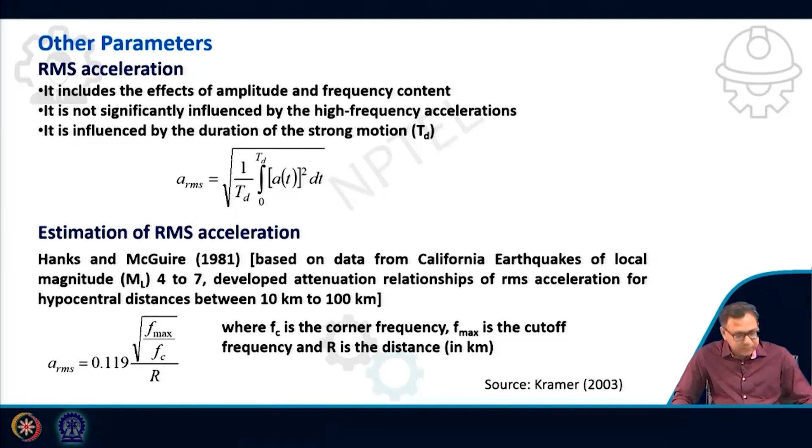Another relationship was proposed in 1985, based on 83 strong motion records from 18 different earthquakes with moment magnitude greater than 5. The other conditions for the database are: R less than 100 kilometer, rupture depth less than 30 kilometer, and soil thickness greater than 10 meter.

So, this is the relationship, where R is the closest distance to the fault rupture, in kilometer. That is more or less the same for all the relationships. And MW is the moment magnitude. This is log 10.

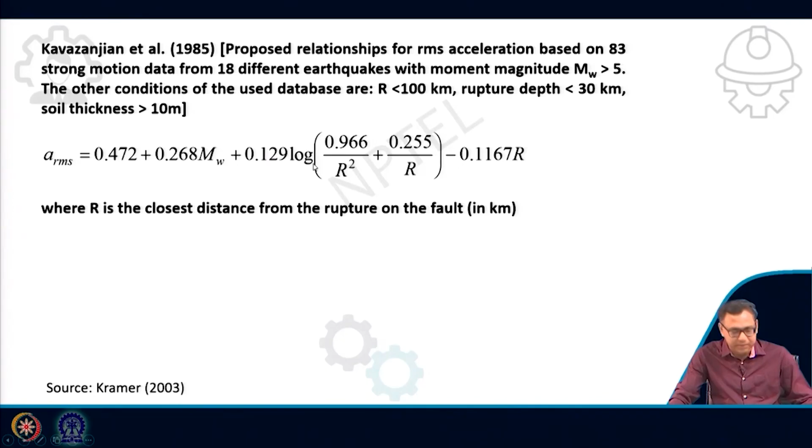Now, another parameter is the Arias intensity, IA. It is obtained by integration over the entire duration of the earthquake rather than over the duration of strong ground motion. The previous parameters were based on strong ground motion duration, but this parameter uses the entire earthquake. So how you define the strong ground motion will not influence this parameter.

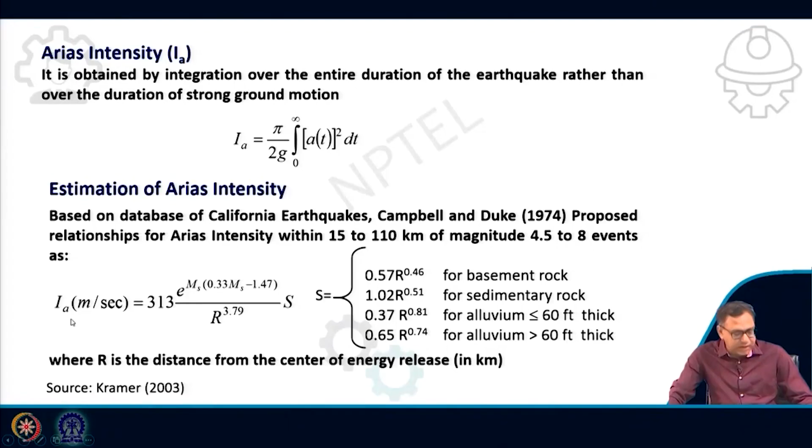So how to estimate this parameter? Based on a database of California earthquakes, Campbell and Duke 1974 proposed a relationship for Arias intensity within 15 to 110 kilometer distance for magnitude 4.5 to 8 events. The unit is meter per second, where R is the distance from the center of energy, and S depends on the rock or soil. For basement rock, the expression is 0.57 R to the power 0.46. For different rock and soil, you get the S value from this table; if you know R, you get IA in meter per second.

So now I will discuss a few examples, and show how we can use these relationships as well as some responses I have already discussed. The first one relates to the Fourier series: how to estimate the coefficients for a Fourier series. That is my first example, the example for Fourier series.

Or you should say that if we have a function, so Fourier series, what I have written in trigonometric form: if we have a variable x(t), then that will be equal to a0 plus summation of n equal to 1 to infinity of an cos omega nt plus bn sin omega nt, that I have discussed.

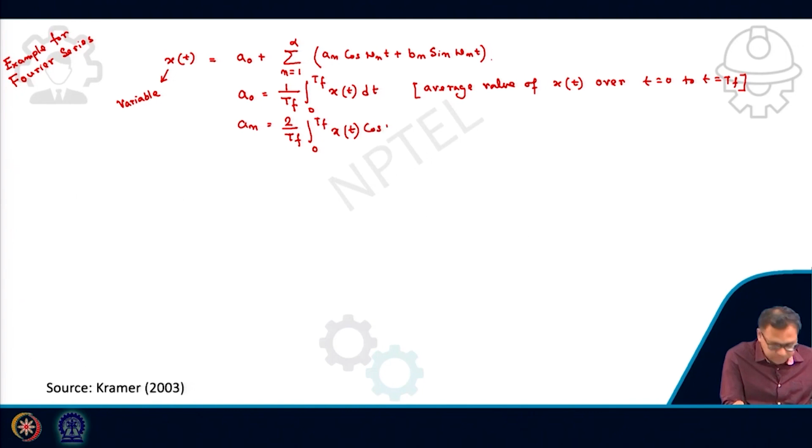And your an is equal to 2 by Tf, integral 0 to Tf of x(t) cos omega nt dt, and the bn expression was again 2 by Tf, integral 0 to Tf of x(t), sorry, this will be sine, sin omega nt dt. Now suppose I consider one function or the variable,

and this side also the same thing. Okay, so this is the variable. So here this is your x(t) and this is your t, and this one is a0 and this one will be minus a0. This is plus A0, this is minus A0. For this function I want to get the Fourier series, and I want to get what would be the coefficients of the Fourier series.

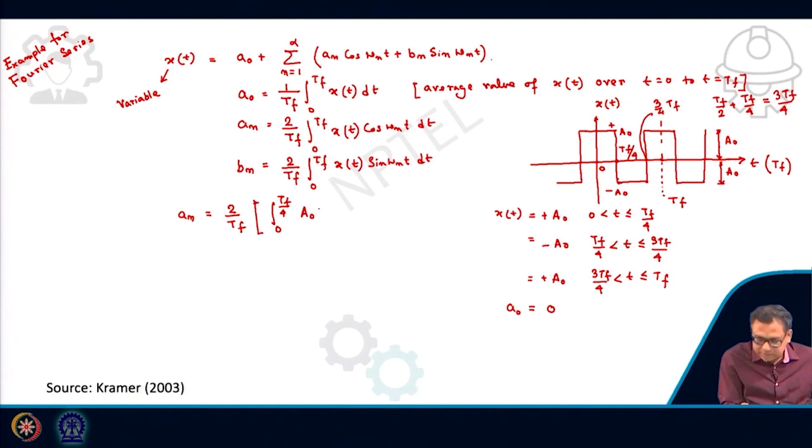And what about the an? an will be 2 by Tf, then if I divide the integration: 0 to Tf by 4, x(t) will be a0, a0 cos omega nt, then plus Tf by 4 to 3 Tf by 4, this will be minus a0 cos omega nt, plus 3 Tf by 4 to Tf, this will be again plus a0 cos omega nt. I have divided into 3 parts because the function is in such a way. So this is plus, minus, then again plus.

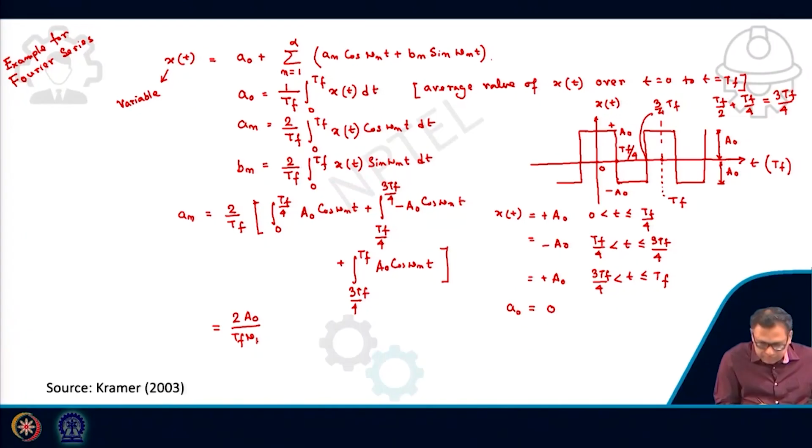Now if I do the integration, what will happen? I take A0 outside, 2 A0 divided by Tf, then omega n, now in place of omega n I am writing omega 1, because I am taking n equal to 1.

First case, so that means it will be A1. Okay, so now I am taking n as 1. So now if I take 1, this will be omega n, this integration of cos omega t. So it will be 1 by omega 1. Now n is 1. So now if I take this value, then this will be sin omega 1 t. The limit is 0 to Tf by 4.

Then again plus, this is your minus. So this will be minus again sin omega 1 t. The limit will be Tf by 4 to 3 Tf by 4, then plus again sin omega 1 t. Limit will be 3 Tf by 4 to Tf. Okay, so I can give this limit. Now if I put this limit, then what will happen?

If I put this limit, then this will be my A1, that will be equal to 2A0 divided by Tf omega 1, because I am now taking omega 1. So this will be sin omega 1 Tf by 4, then minus sin 0, then minus sin omega 1 into 3 Tf by 4.

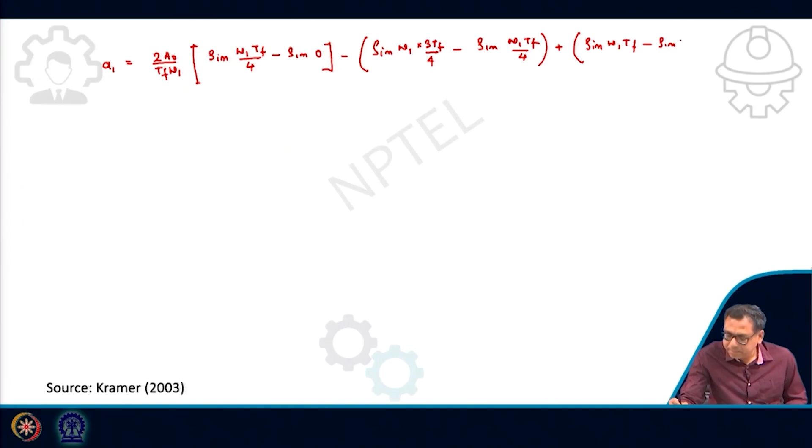Okay, minus sin omega 1 Tf by 4, then plus sin omega 1 Tf minus sin Tf omega 1 divided by 4. Okay. So now I know that your omega 1 is equal to 2 pi by T1 or Tf. 2 pi by Tf, because omega is 2 pi by T.

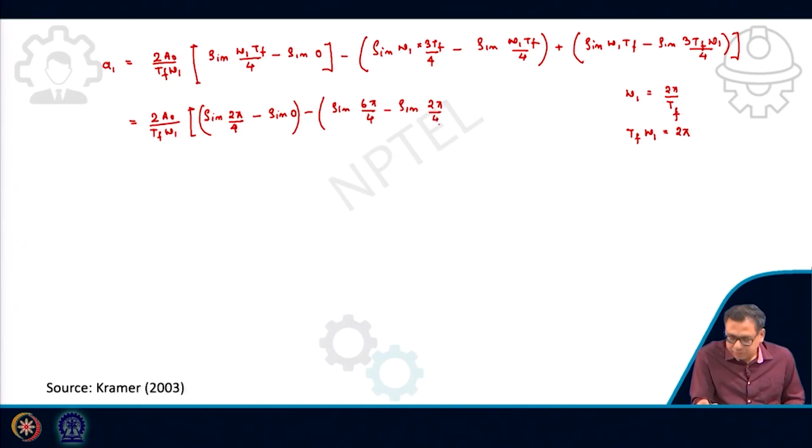So now I can write Tf omega 1 is equal to 2 pi. Now if I put these values, this will be 2A0 by Tf omega 1. So this will be sin 2 pi by 4 minus sin 0, that will be 0. Okay, minus, this will be sin 6 pi by 4 minus sin 2 pi by 4, okay, plus sin 2 pi minus sin 6 pi by 4.

So now you can write 2A0 by Tf omega 1 into sin pi by 2. So sin pi by 2 will be 1, this will be 0, then minus, this value is minus 1, this is also plus 1, so this will be minus 1, then plus, sin 2 pi is 0, then this will be again minus 1. Okay, so this value will be 1, 2, 3, 4.

So I can write that this expression 2A0 by Tf omega 1 I can also convert to 2 pi, into 4. Here I will get 4. So this is 1 plus 2 plus 1, 4. So it will be 4A0 by pi. So this will be 4A0 by pi for A1.

Similarly for B1, the B1 expression is 2 by Tf, that I have written. So this will be 0 to Tf x(t) sin omega 1 t dt. So here in place of these things, this will be all cos, because if it is sine and you integrate, in place of cos it is sine. So it will be cos 2 pi by 4, cos 0, like this.

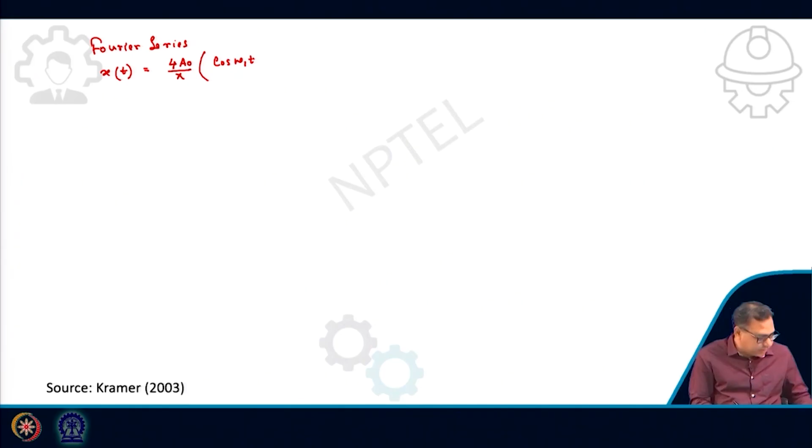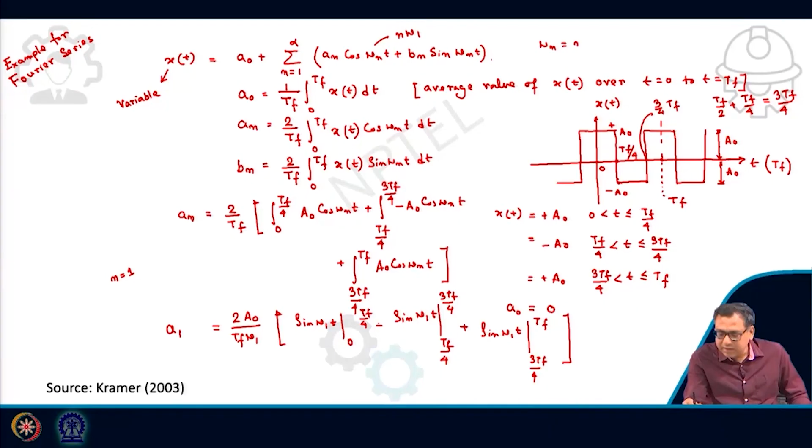So now I can write this will be equal to, first, positive cos omega 1 t. Now next one, it will be negative. For 2 it is equal to 0, for 3 it will be negative. So this will be omega n. Now I have to convert omega n to n omega 1, that I will discuss. So I can get the expression. Second, for n equal to 2 it is 0. For n equal to 3 it is minus.

For n equal to 3, your omega 3 is actually 3 omega 1. Now if you integrate this will be 1 by 3 omega 1. Previously when I integrated this, it was 1 by omega 1. So now it will be 1 by 3 omega 1. So that's why it will be 1 by 3, because 1 by omega 1 I have already taken care of in the expression. This will be 1 by 3 cos 3 omega 1 t.

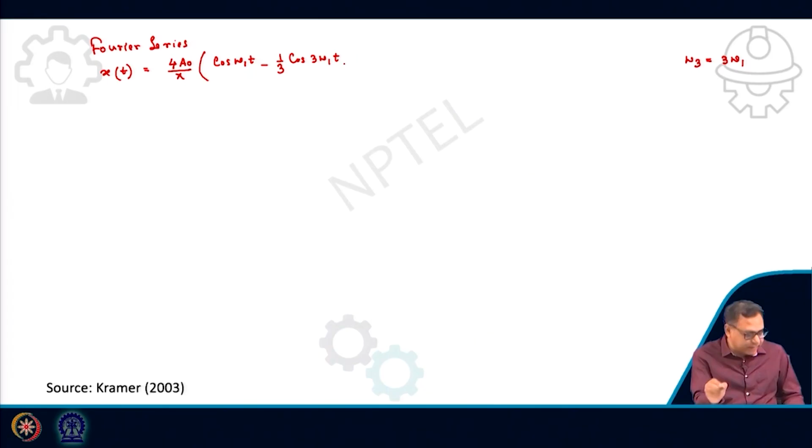Then for 4 again it is 0. For 5 it is positive, 1 by 5 cos 5 omega 1 t. Then 6 again it will be 0. For 7 it will be negative, 1 by 7 cos 7 omega 1 t. 8 is 0, 9 it will be again positive, 10 it is 0. Then 11 it is again negative, 1 by 11, and so on. So this will be my expression of the Fourier series. Okay.

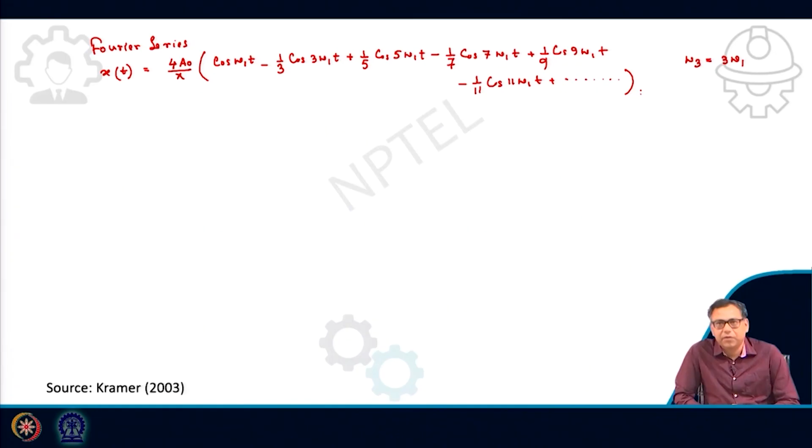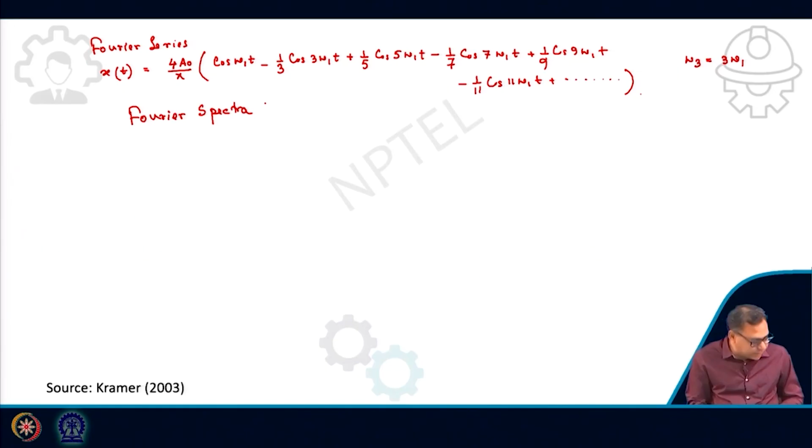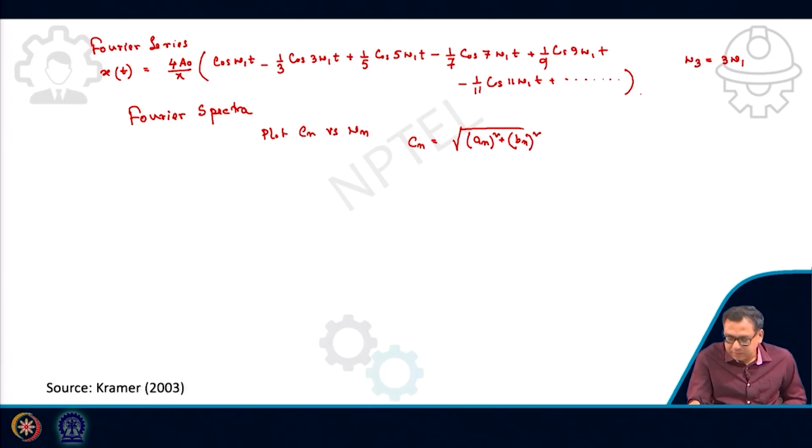So this way I have discussed how we can get a Fourier series for a particular given function. From here I will get the Fourier spectra also. So how will I get the Fourier spectra? You know what the Fourier spectra is? This is a plot between Cn versus omega n. Now what is Cn? Cn is equal to root over an square plus bn square. And your phi is equal to tan inverse bn by an. That is phase. If you plot phi n versus omega n, that will give you the phase spectra.

Now here bn is 0, so Cn will be root over an square. Because bn is equal to 0, and as I have already discussed, C0 is equal to a0, so that is equal to 0. So C1 will be 4A0 by pi. C2 will be equal to 0. C3 will be equal to again 4A0 by 3 pi. Why not minus? Because it is minus whole square, so it will become plus.

C1 is basically root over a1 square, and a1 you will get from here, a1, a2, a3, all this, and C2 is basically root over a2 square. Now a2 is equal to 0. Then C3 is basically root over a3 square. a3 is minus 4A0 by pi. So squared it will be positive, then take the root, this will be the value. So this way I can write C4 is equal to 0, then C5 will be again 4A0 by, so here there will be 3 pi, this will be 5 pi.

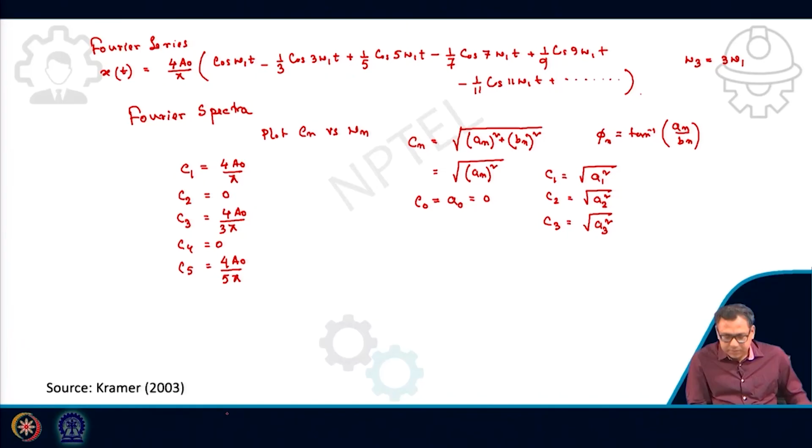Why 3 pi? Here, if you see, I missed one term, that is n. Why will there be n? Because as I mentioned, if I do that integration, there will be 1 by n. So that I missed here. Please add that. If it is omega 1 and I do the integration, this is 1 by omega 1. If it is 3, then it will be 1 by 3 omega 1. If it is 5, then it will be 1 by 5 omega 1. So it is 1 by n omega 1.

Here n is equal to 1, that's why I have not written it. Actually, after integration it is 1 by n into omega 1, because omega n is equal to n into omega 1. So if I do the integration, it will be 1 by n omega 1. So that n you have to take care of here. So here also this will actually be 3. For 1 it is 1, for 2 it is 0, it will be 3.

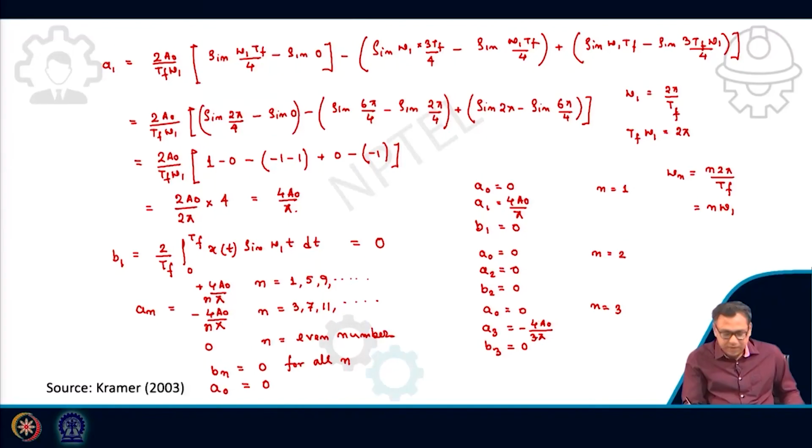That's why when I take this value, I have taken 4 A0 by pi. So in this, the n value I have not taken into consideration when I take the common term. So that's why this n will come here: 1 by 3 in case of n equal to 3, 1 by 5, 1 by 7, and so on. So that's why your n term should be there.

So C1 will be for n equal to 1, C2 is 0, C3 is 4 A0 by 3 pi, C4, C6 will be equal to 0, C7 will be equal to 4 A0 by 7 pi. And C8 equal to 0, and so on. So now if I plot this Fourier spectra, this will be your omega, and here it will be your Cn. So that is your Fourier amplitude.

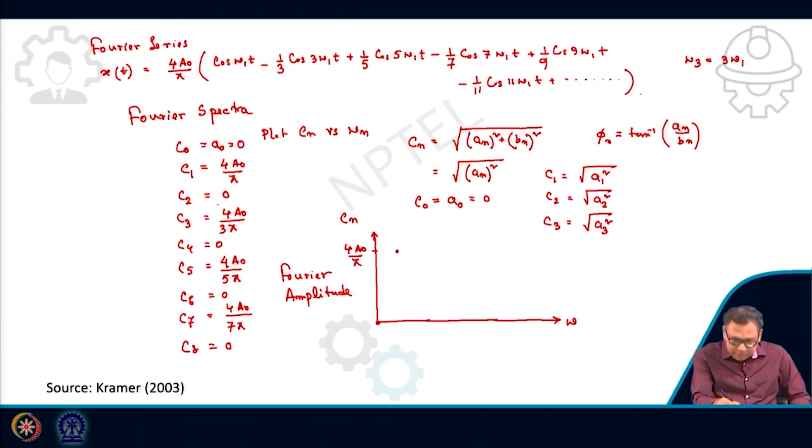So first, C0 is equal to A0, equal to 0, so this will be 0. Then the next term is this one. What is that value? This will be 4 A0 by pi. After that it will start reducing, because this is 4 A0 by pi, then 1 by third, 1 by fifth, 1 by 7. So if you say this is your 1, this is 2, this is 3, this is 4, this is 5.

So at 2 it will be 0, at 3 it will be 1/3 of that, at 4 again it will be 0, 5 will be like this, at 6 it will again be 0, 7 will be like this here, 8 will be 0, so like this. So this is your spectral value. If I write in different colors, these are the points: 0, then 4 A0 by pi, then 0, again, then 0, this is one value, this is 0.

What is this value? This value will be 4 A0 by 3 pi. What is this value? This value will be 4 A0 by 5 pi, and this value is definitely 4 A0 by pi, and so on. This is 0, this is 1, 2, 3, 4, 5, 6, this is 7, 4 A0 by 7 pi, this is 8, similarly again it will be 9. So these will be the variation. So these will be your Fourier spectra.